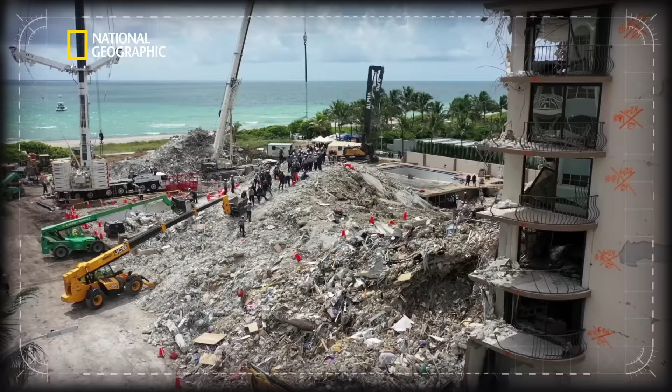In a high-rise building, there was no warning. At sea, innocent people died. In a train, everything was on fire and burning.

Disasters can begin with the smallest things: changing the opening hours of a restaurant, a bad glue job, a paperwork error.

Now, combining the latest research with every available source of evidence, experts will forensically analyze 3 disasters, down to each tiny detail. You've really got to think outside the box. You have to work your way back and understand each link in the chain.

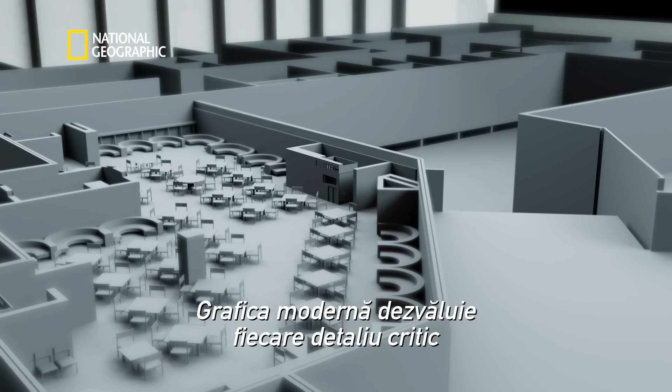State-of-the-art graphics reveal every critical detail at every critical moment. This whole disaster could have been averted. We can dissect them, get inside, or underneath, freeze time, and even reverse it.

To conduct a complete disaster autopsy.

Northeast Japan, March 11th, 2011. A massive magnitude 9.0 earthquake strikes just 45 miles off the coast. This is the most powerful earthquake ever to hit Japan. It had actually shifted the Earth on its axis.

A giant tsunami hits the coastline. The tsunami is absolutely devastating. Cars, boats, buildings, people are swept away. Over 18,000 people lose their lives. But even then, the disaster isn't over.

150 miles north of Tokyo is the Fukushima Daiichi nuclear power plant. This earthquake is an absolute disaster for the nuclear power plant. Over the next few days, huge explosions erupt at Fukushima. Now, as the news has come through of another nuclear explosion, we're being moved indoors. These are very nervous times.

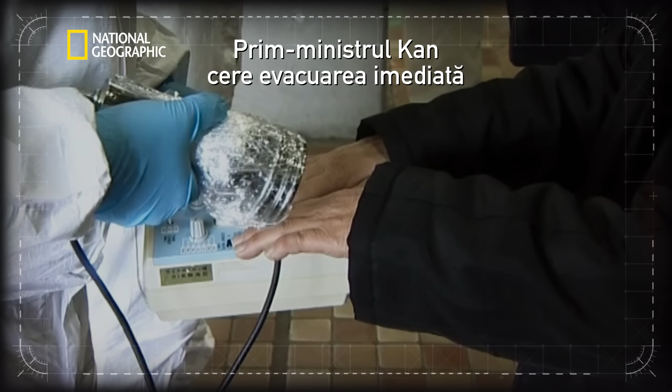4 of the plant's 6 nuclear reactors are destroyed. Nuclear regulators give the Fukushima disaster a severity level of 7, the highest possible rating, the same as the 1986 disaster at Chernobyl. Prime Minister Kan calls for the immediate evacuation of about 100,000 residents in the area. They are left without homes and deeply fearful.

Now, using eyewitness testimony, scientific analysis, and photographic evidence from inside the devastated reactors, we will recreate the disaster. What really happened at Fukushima?

It would be easy to point the finger of blame here at Mother Nature. There was an earthquake. But the thing is that Japan has 5 nuclear power plants located in roughly the same stretch of coast, and only Fukushima became a disaster. So there must be more to this disaster than just the earthquake. What is so special about Fukushima?

There are ancillary buildings, offices, workshops, but the main structures at the Fukushima plant are 6 nuclear reactors spread right along the coast.

Satellite images taken 3 days after the disaster show clear evidence of explosive damage. 2 structures are in ruins. It's clear that these are reactor buildings. Reactor 1 is clearly damaged. Reactor 3 is a smoking ruin. This is the core of the disaster.

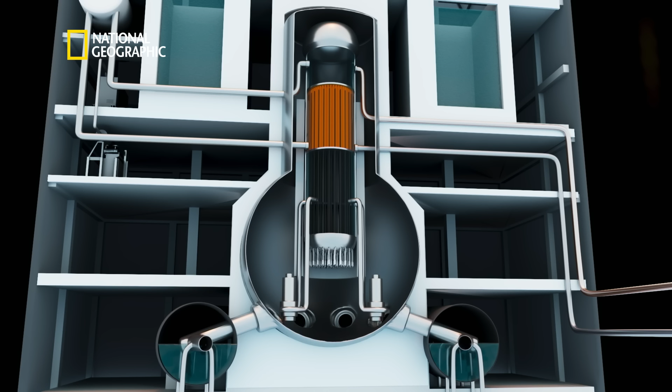So why do these reactor buildings explode? Fukushima Daiichi has boiling water reactors, which basically means that inside each unit, there's a giant steel tank, a pressure vessel. Inside the pressure vessel, there is nuclear fuel. And the nuclear fuel heats water, it becomes steam, the steam spins turbines, which generates electricity.

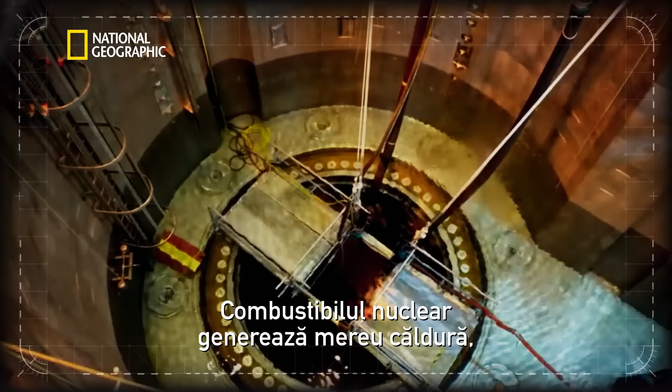So the critical thing to avoid is overheating. Because the nuclear fuel is constantly generating heat, it actually has to be cooled down, and otherwise, if it gets too hot, it will melt. A core meltdown is a nightmare scenario that the plant is designed to avoid at all costs. It's constantly having cold water pumped around it to remove the heat.

Plant data records that after the earthquake strikes, automatic safety systems shut down the reactors. But pumping cooling water remains essential to remove the vast amounts of residual heat still being produced. Data suggests this is where things begin to go wrong.

When the earthquake happened, Fukushima experienced loss of power. The crucial cooling water is circulated by electric pumps. Without power, they will stop. If the nuclear fuel isn't constantly cooled, you can get steam building up and up in the reactor vessel until eventually it becomes so pressurized that it can literally burst, releasing nuclear material out into the atmosphere.

Do the reactor vessels at Fukushima burst? After the incident, TEPCO, the Tokyo Electric Power Company, which owns the plant, sends camera-equipped robots into the site to try to get a survey of the damage.

They provide vital evidence from inside the containment vessel. So looking at the footage, we see that the containment vessels are actually still largely intact. There's no evidence of a steam explosion. It is clear the reactor vessels have not ruptured.

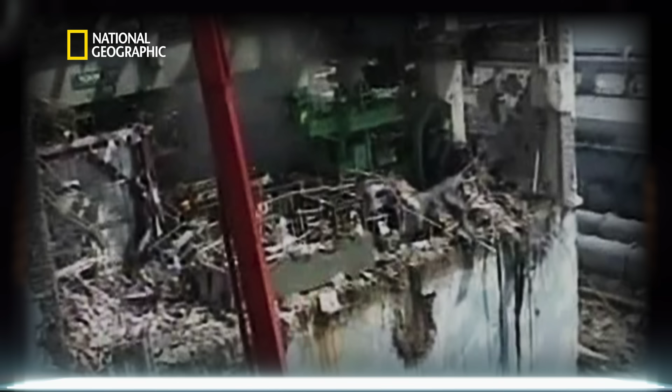So what does cause the devastating explosions? Video evidence from the robots reveals another vital clue. The nuclear fuel in reactors 1 and 3 has actually melted.

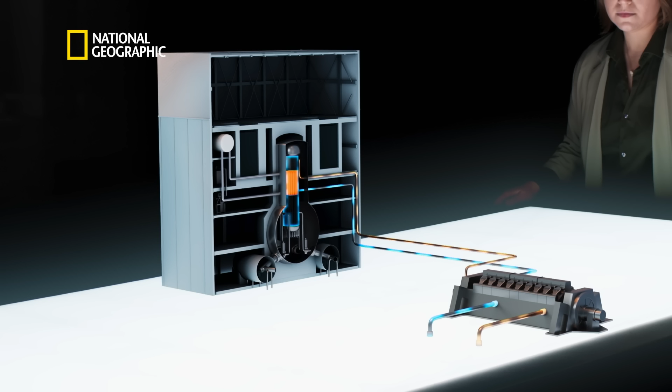Without pumps to replenish the water, the temperature inside the reactor starts rapidly rising to as high as 5,000 degrees Fahrenheit. This is not only hot enough to melt the fuel, like the robotic footage suggests happened, but also hot enough for a very dangerous reaction to start happening.

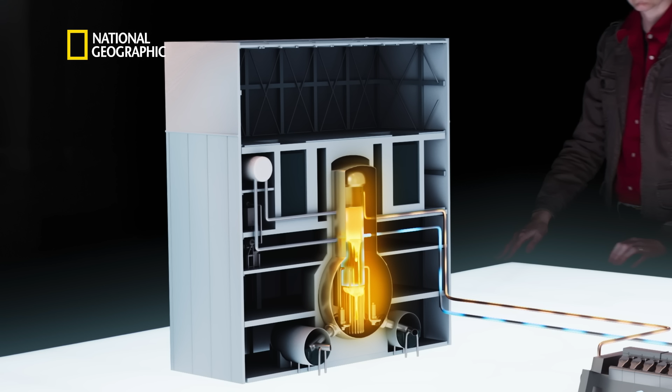Without cooling circulation, the water surrounding the rods will boil into steam, and that creates a whole new risk. The fuel rods are coated in zirconium, and that's important because in the presence of very hot steam, zirconium undergoes chemical reactions that produce hydrogen. Could the Fukushima disaster result from a hydrogen explosion?

Hydrogen is famously explosive, but only in the presence of oxygen. And there's none inside the reactor vessel.

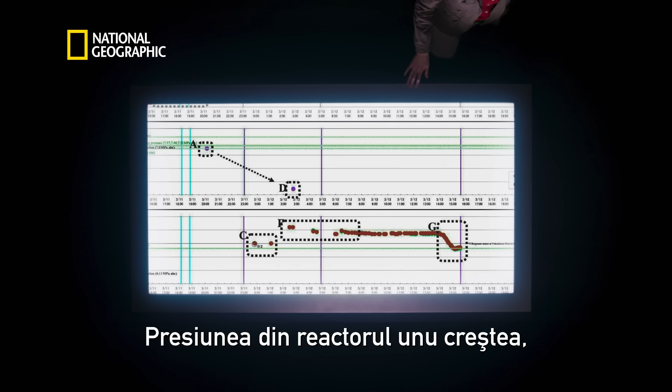But plant records from the morning after the earthquake might help explain what happens. The pressure in reactor 1 has been climbing, but at 4 a.m. this suddenly changes. When they measure the pressure in the reactor, it has actually fallen since the last reading, but nobody's done anything to relieve the pressure, meaning that there must be a leak.

This means that before the first explosion in reactor 1, a pipe is leaking the contents of the reactor vessel into the building surrounding it. With these ruptured pipes, they're not just releasing steam, they're also releasing hydrogen. And in the reactor building, there is plenty of oxygen. The hydrogen explodes, damaging the reactor buildings and leaking radioactive material into the atmosphere.

It is clear this disaster begins with the loss of electrical power to the cooling pumps. This causes a core meltdown, resulting in hydrogen explosions. But according to the design plans of Fukushima, losing electrical power shouldn't be possible.

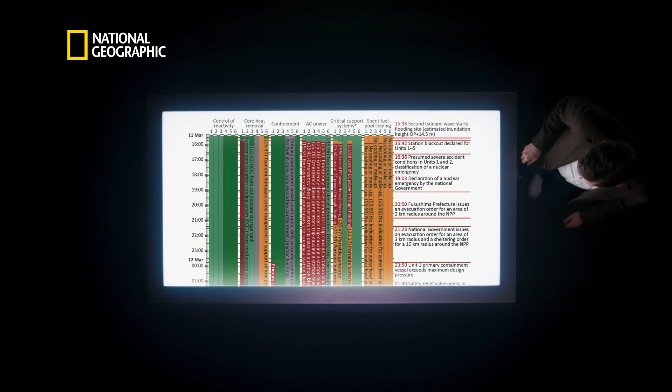There were a variety of backup systems, including diesel generators and batteries, to ensure that the electricity supply could be maintained even in the event of a power outage. But plant records show that less than 1 hour after the earthquake, nearly all this backup electrical power has failed. How can these separate safety systems fail simultaneously?

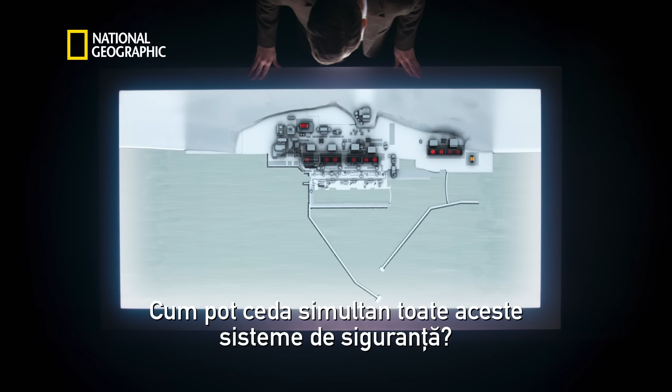The plans of the Fukushima reactor complex show that the majority of the power systems were located in the basement of the plants. And this is for a good reason. They're there to protect them from earthquakes, ironically. A lot of thought has gone into designing a plant that is earthquake-proof.

When they built the power plant, the engineers artificially lowered the ground about 80 feet such that it could be anchored into bedrock. This makes the plant more earthquake resistant. So, the safety systems were effectively bolted to bedrock.

But for coastal installations like Fukushima, earthquake damage is not the only risk. At 3:36 p.m. on March 11th, a 50-foot high wave hit Japan's coast. And this is just minutes before the backup generators and the batteries all go down.

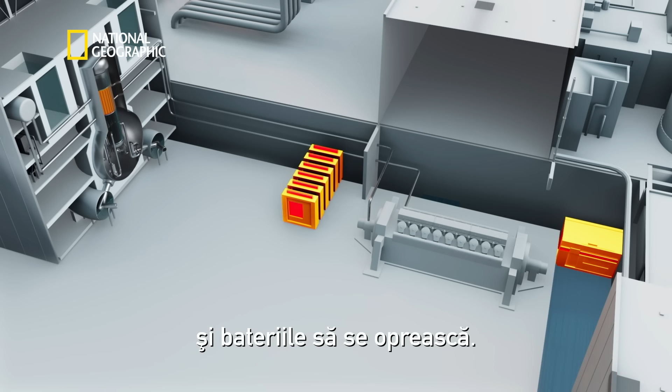Ground level at Fukushima ends up just over 30 feet above sea level, and the backup systems are in the basement. So when the tsunami hits, the basement is submerged, destroying the emergency electricity supply. But tsunamis are a well-known risk on the Japanese coast. Why isn't the site protected?

The Fukushima nuclear power plant is built on the coast because it requires lots of water for cooling its reactors. The problem with putting a nuclear reactor on the Japanese coast is that that coast suffers extraordinarily from tsunami waves. Images pre-disaster show that Fukushima is built with protective seawalls for exactly this reason.

When TEPCO was building the plant, they looked into the historic record to see how high they should build the seawalls to resist tsunamis. And they found that they would need to build it about 10 feet high in order to resist the big waves. To be extra safe, they actually added another 9 feet, building the seawalls up to 19 feet.

So why do these seawalls fail? Oceanographic data showed 2 tsunamis hitting the coast on March the 11th. The first, at 3:27 p.m., is 13 feet high and is easily deflected by the seawall.

This photographic evidence shows the second wave. It is very different. 10 minutes later, the big one arrives. It's 3 times higher than Fukushima's sea walls, and it overwhelms the generators and the batteries.

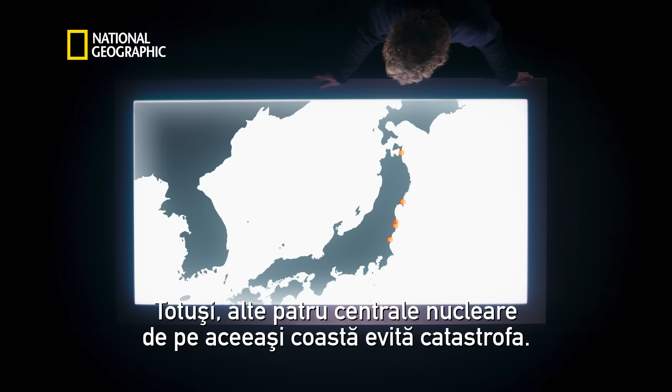Yet 4 other nuclear plants along the same coast avoid catastrophe. The Onagawa nuclear power plant, which is about 75 miles north of Fukushima, was hit by a wave of the same size, but it survived pretty much intact. Why is it only at Fukushima that tsunami defenses fail?

The designs for the Fukushima seawall were based on a tsunami that hit Japan on May 22nd, 1960, about 10 years before the plant was built. But that earthquake happened off the coast of Chile, 10,000 miles from Japan. So the tsunami wave, by the time it arrived, was only 10 feet high.

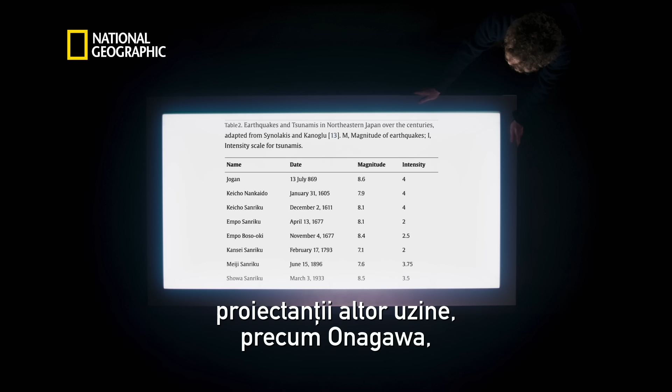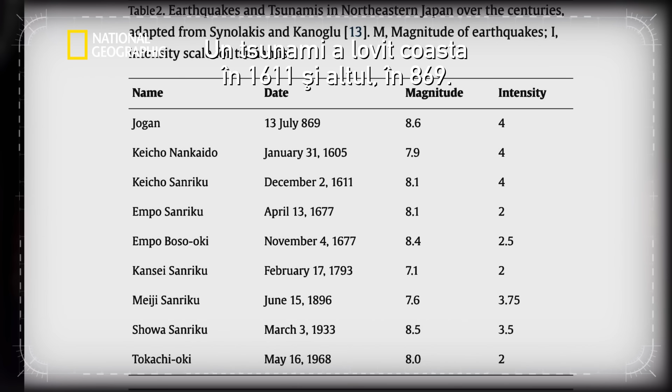Unlike Fukushima, the designers of other plants, like Onagawa, read Japan's centuries-long history of tsunami records in more detail. The designers of Onagawa had looked much farther back in history for the design basis of their seawalls, to a tsunami that hit the coast in 1611 and another one that hit in 869. Both of those tsunami waves were much larger than the 1960 tsunami. Because of that, they built significantly higher seawalls.

There is now enough evidence to piece together what happens in the Fukushima Daiichi nuclear disaster.

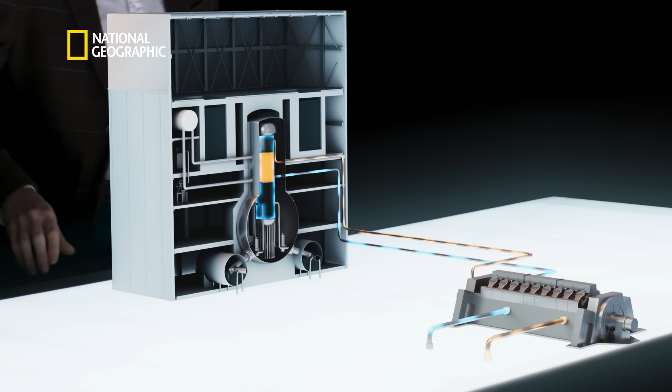At 2:46 p.m. on March 11th, 2011, a magnitude 9.0 earthquake hits Japan. The earthquake causes a loss of power at Fukushima and triggers an automatic shutdown. Backup generators kick in to keep coolant circulating around the reactor cores.

At 3:36 p.m., a 50-foot high tsunami breaches the seawalls around the plant, which has been built too low to protect it. Seawater floods most of the backup generators and batteries located in the basement of the plant's buildings. 5 of the 6 reactors lose power.

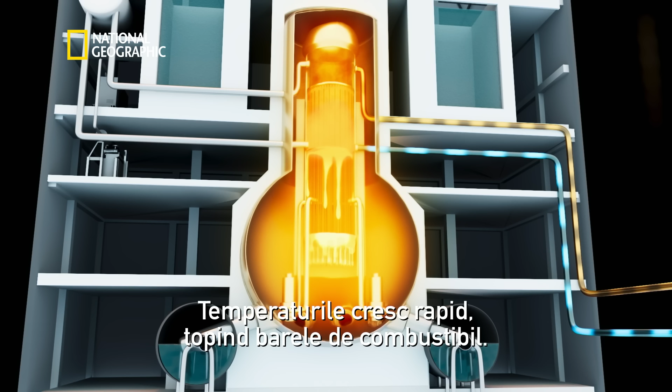Cooling water stops circulating around the active reactor cores. Without this cooling, the cores continue to heat and pressure grows in the vessels surrounding the cores. Temperatures rapidly climb, melting the fuel rods. Their zirconium coating begins reacting with the steam to produce hydrogen.

The highly flammable and radioactively contaminated hydrogen gas leaks out of reactors 1 and 3. The leaking hydrogen explodes, wrecking the reactor buildings and shooting radioactive material into the atmosphere.

It takes 2 weeks of hosing seawater into the reactors to stabilize them after the meltdowns. The workers who stayed behind risked their lives to prevent an even greater tragedy, although a lot of damage had already been done. Over 100,000 people were displaced, and giant swaths of land were declared uninhabitable and unfarmable.

In the months following the disaster, European leaders decided on a new set of safety standards for nuclear power, and several countries decided to forego nuclear power altogether.

The disaster may have been triggered by a natural event, but it exposed human errors in its design that still haunt Japan. There are many parts of the site that remain inaccessible to humans. It's simply too dangerous for them to go.

Fukushima was carefully designed to avoid the explosions that ultimately wreck it. But some disasters are caused by things whose sole purpose is to blow up.

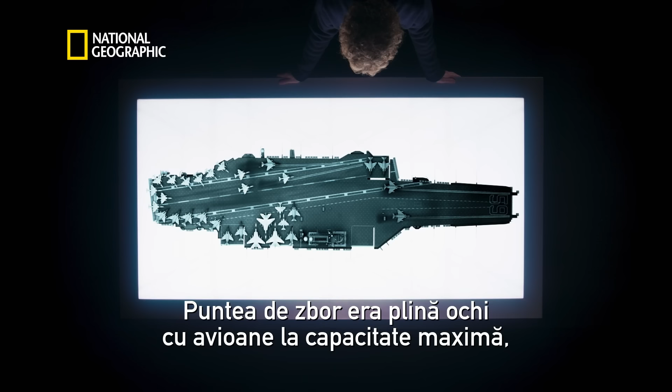Using the available evidence, we can construct a timeline of the disaster on the USS Forrestal. The crew were preparing for their second launch of attack aircraft that day, and the flight deck was absolutely packed with fully fueled aircraft, 2 of which had just taken off.

Surviving crew members placed the start of the fire at the rear of the flight deck, beneath 2 Skyhawk bombers, flown by Lieutenant Commander Fred White and the future Senator and Republican presidential candidate, John McCain. Eyewitness accounts suggest that the fire started after one of the fuel tanks on the 2 planes ruptured.

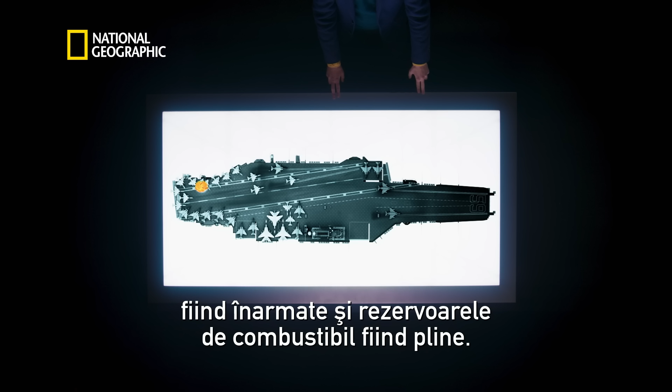Survivor testimony confirms that both planes are about to start a new bombing mission, meaning they are armed, and their fuel tanks are full. Each Skyhawk can hold 400 gallons of fuel. That means there are now gallons and gallons of burning jet fuel on the flight deck. And the flight deck is crowded with explosives and missiles and other fully fueled jets.

One of the most vital sources of evidence comes from the ship's PLAT camera, a manned camera system used to record landings and takeoffs. It captures the entire disaster on film.

The operator misses the start of the fire, but does manage to capture the crew grabbing their gear and racing off to fight the conflagration. 94 seconds after fire breaks out, there is an explosion underneath one of the Skyhawks. 9 seconds later, a second, more powerful explosion rocks the ship.

The explosion killed or maimed several crew members, including White, who couldn't escape his burning plane. But the pattern of fatalities recorded in naval records reveals something striking. Despite the ferocity of the blasts, only 28 of the 134 crew killed are up on the flight deck. Why are so many killed below decks?

Photographic evidence shows that exploding bombs create large holes in the 1 3/4 inch thick steel flight deck. And the deck has hundreds of gallons of burning jet fuel from the crippled Skyhawks running across it. The gash in the flight deck allows the burning jet fuel to flow down and penetrate into other decks, causing new fires and creating huge volumes of toxic smoke in confined spaces, which makes it very difficult for people to escape. Because the ship operates 24 hours a day, many crew are not even awake.

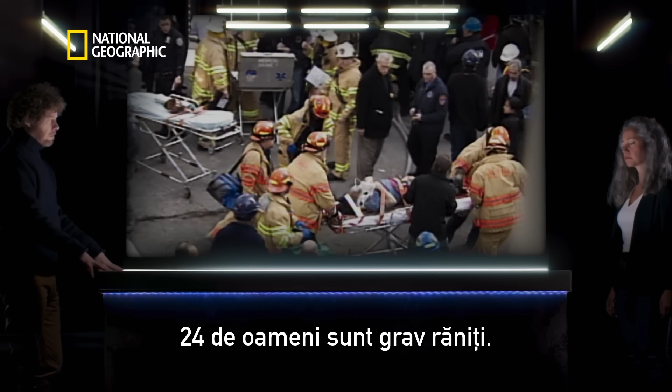The operator and a victim in the building hit by the crane also die. 24 people are seriously injured. This was a huge crane, and one eyewitness said that when it landed, it reminded him of what happened when the World Trade Centers came down, dust and debris everywhere.

Using eyewitness statements, engineering reports, and analysis of the wreckage site, we will digitally dissect the disaster. What causes this lethal collapse?

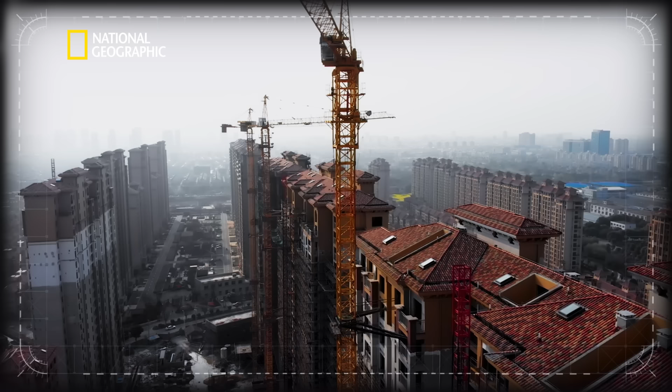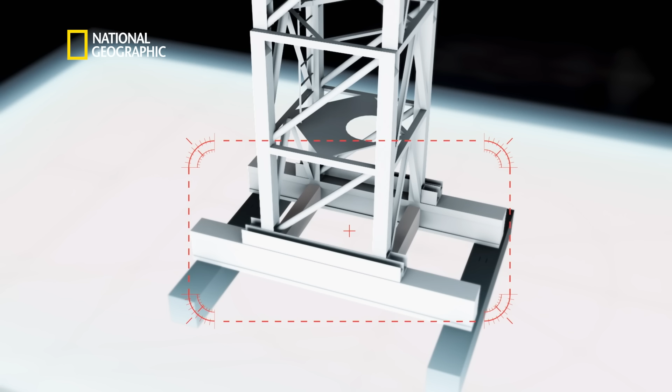The crane that collapses is known as a static tower crane. A tower crane consists of a single lattice mast, a horizontal boom, and the operator's cabin just below that boom. It's a static system, meaning it doesn't move, and it's fixed to the building. The collars and tie beams lock the crane onto the building, providing the lateral support it needs to stay in place. The bottom of the crane is secured to a concrete base. The crane legs sit on 2 large steel beams, which spread the weight over 2 large reinforced concrete walls. So the base is designed to take the whole vertical load of the crane.

But photographic evidence shows significant damage to this base. Could the entire disaster be caused by a fault in the crane's foundations?

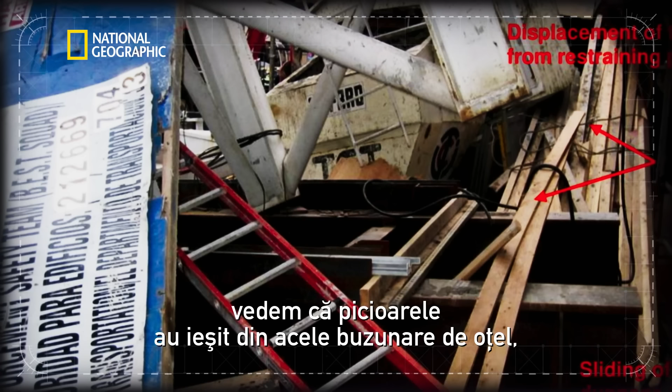The feet of the tower are displaced, but the design of the base is supposed to prevent this. The feet of the tower are in pockets on 2 steel beams which span between reinforced concrete walls. These steel pockets are designed to stop the legs moving sideways. When we look at the foot of the tower after the collapse, you can see the feet have actually moved out of those steel pockets, and the foot of the tower has moved towards the building. That really shouldn't happen.

Photographic evidence suggests the steel pockets have not failed. Instead, their edges have been crushed. One face is bent and squashed inwards. For this to happen, the tower leg would have to lean sideways into the edge of the stationary pocket to crush it. This means the pockets and base don't fail. The crush damage is caused by the tower above moving. That should be impossible. The tower itself is fixed to the building with connectors at the 3rd and 9th floor.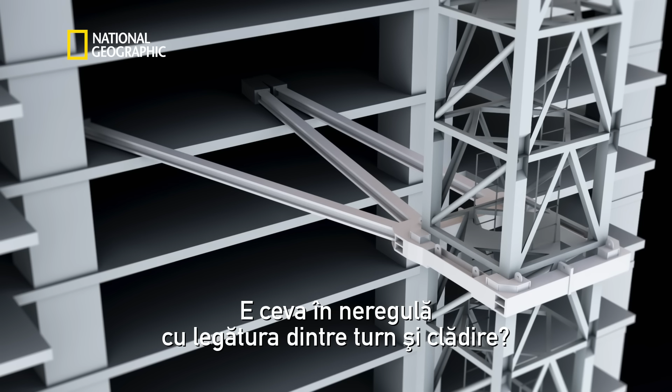Is there something wrong with the tower's ties to the building? To understand what happened, we need to create a timeline of the disaster. Engineers confirm that prior to the collapse, the crane is bolted to the building at the 3rd and 9th floors.

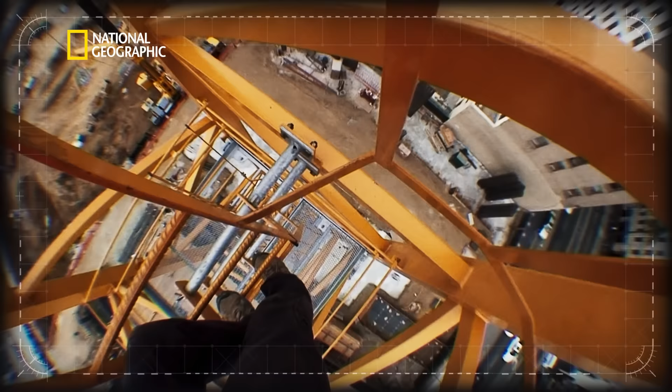The crane was involved in the construction of a 43-story residential building in Midtown East. Construction had already reached the 19th floor. As the building grows taller, the crane has to grow with it, a process known as jumping the crane. This involves installing a new section of the tower. We know from survivors that at the time of the collapse, the 6-man crane team had just completed raising the tower by 54 feet, working up to 238 feet above the Manhattan streets.

The latest segment had extended the tower as far as it could go without fitting a new tie to the building. So the next job, once they jumped the crane, was to fit a new collar and ties on the 18th floor. Evidence from the crane operators confirms the workers are attaching this 18th floor collar at the time of the collapse. The first sign that anything was wrong was when huge pieces of metal started crashing down the side of the crane. Photographic evidence at the 3rd floor level clearly identifies these huge pieces of metal as the collars holding the crane to the building. What we see is the collars from the higher elevations sitting on top of each other on the 3rd floor - the 9th floor collar sandwiched between the 3rd floor and the 18th floor collar, which was being installed at the time of the collapse.

How could both of these massive collars fall? Eyewitness evidence confirms that at the time of the 2008 New York crane collapse, the collar on the 18th floor is being fitted. This is a huge collar weighing 5.5 tons in 2 pieces, which are connected around the tower.

This key photographic evidence is taken just before the collapse. It shows heavy polyester slings temporarily supporting the new collar to the tower until workers connect it to the building with steel beams. Before they could connect the tie beams to the collar, these slings snapped.

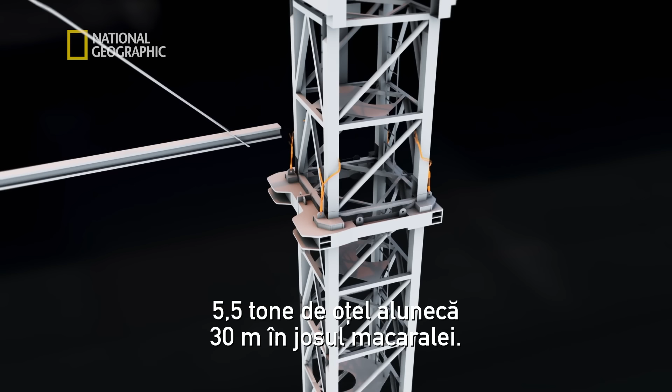This meant that nothing was really holding up this 5.5-ton piece of metal. 5.5 tons of steel slides 100 feet down the crane tower. It slams into the 9th floor collar. The force of the impact rips the 2nd collar away from the building. Both now plummet down onto the 3rd floor collar.

The 3rd floor collar doesn't completely break away from its connections, so that's why the 3rd, 9th, and 18th floor collars remain at that point.

There are now huge unbalanced loads on the tower. There is a permanent 42-ton counterweight on the back of the boom that allows it to lift much heavier weights. The counterweight creates a huge imbalance, and that's exactly why the tower is connected to the building to counteract that.

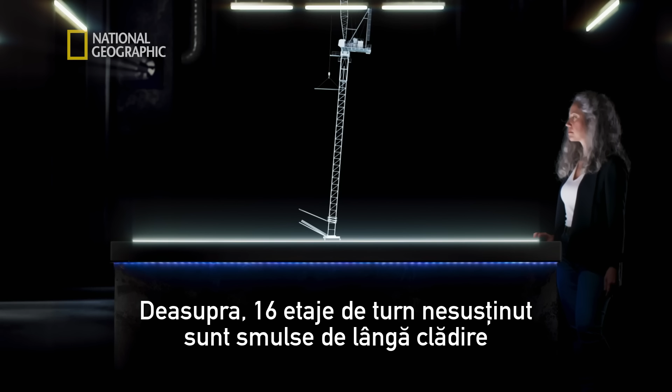After the collars fall, the crane is only connected at one point, the 3rd floor. Above, 16 stories of unsupported tower are being pulled away from the building by the immense counterweight on the boom. The crane tower was moved away from the building by the weight sitting on top, and it pivoted on one remaining connection at the 3rd floor collar. The leverage of the 42-ton counterweight over 16 stories above is immense.

This created enough force for the legs to pop from their pockets. Once that happens, the crane is doomed. The disaster is triggered by the failure of the polyester slings holding the collar on the 18th floor.

How can these have snapped? The crane manufacturer provides very precise instructions on how to lift the collars to prevent any potential errors. Each half of the collar has 6 lugs: 2 are for lifting the collar and 4 are for securing it to the tower. It is critical that the correct ones are used for each job.

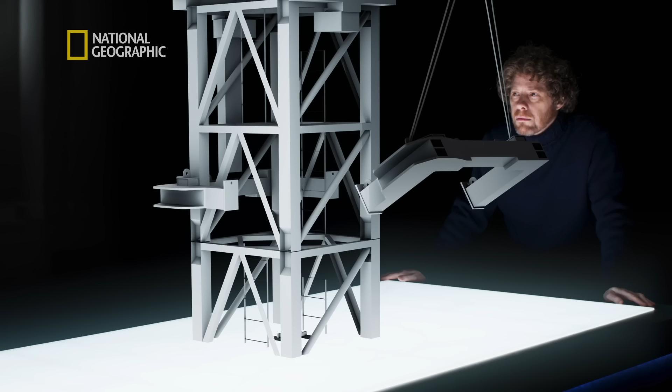What should happen is that the 2 halves of the collars should be lifted by the lifting lugs specified at the corners of the collars, and then secured thereafter using the lugs in the center of the collars. This allows the securing slings to be tied to smooth supporting bars on the tower, designed for that purpose, while the collar is secured to the building.

But according to the evidence, this does not happen. You can see from a photo taken an hour before the collapse that one of those halves is actually being lifted by the central connections, not the lifting lugs at the corners. It sounds like a trivial change, but the consequence is that the crane team secure the collar to the tower on the available lugs at the corners.

Now the securing slings cannot be fitted around the correct smooth bars. They improvised and just connected the collar to the tower at those corner positions. This improvisation creates critical problems. The first is that there are only positions to fix the collar with 4 slings as opposed to the 8 specified in the instructions. The collar is now held in place 180 feet above the New York streets by half the correct number of slings. And that's not the only error.

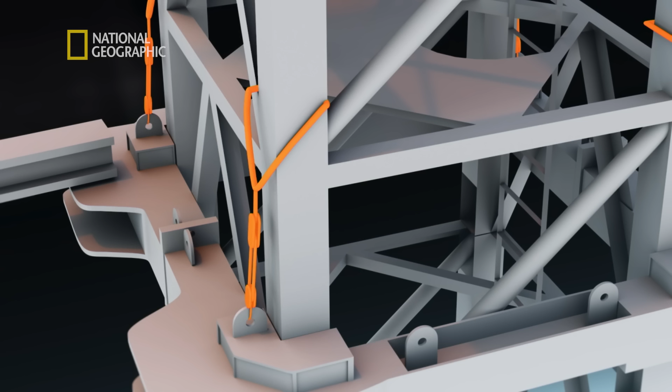By connecting to the corners, the slings are being forced into sharp V-shaped grooves, which brings them into risk of cutting at the sharp edge. So you have fewer slings under a lot of stress, being stressed over a sharp edge that gave them a risk of being cut. Not only are there half the correct number of slings, but they are secured in a way that makes them vulnerable to failure.

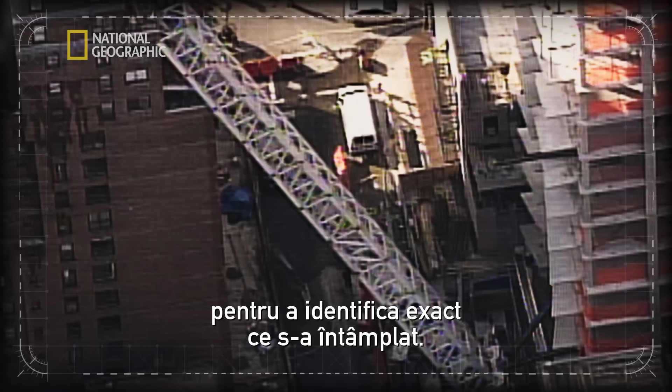We can now piece together the evidence of the 2008 Manhattan crane disaster to identify exactly what happens. The first in a series of errors that led to the disaster is the lifting of those collars by the wrong sets of fittings. This prevents the crane's 5 riggers, 200 feet up in the air, from securing the collar correctly, so they improvise. They secure it using half the correct number of polyester slings.

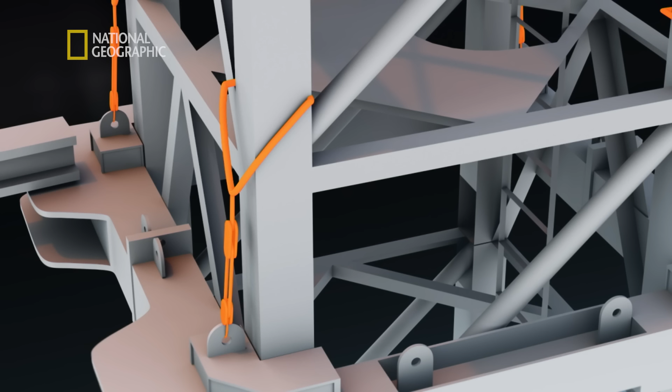They loop these weakened slings around V-shaped grooves on the corners of the crane. These pinch the slings and increase the strain on them. Before the riggers can attach the collar to the building, the polyester slings snap. The 5.5-ton collar falls 100 feet down the crane mast. It smashes into the collar on the 9th floor, tearing it away from the building.

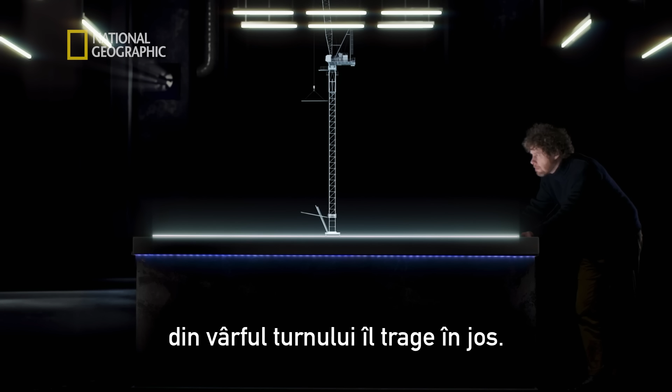The crane is now attached to the building by a single connection at the 3rd floor. At that point, we have our 42-ton counterweight at the top of the tower, pulling the tower away. The one remaining connection on the 3rd floor collar acts as a pivot point. The legs of the tower dislodge from their supporting pockets. The 238-foot crane falls into the adjacent building.

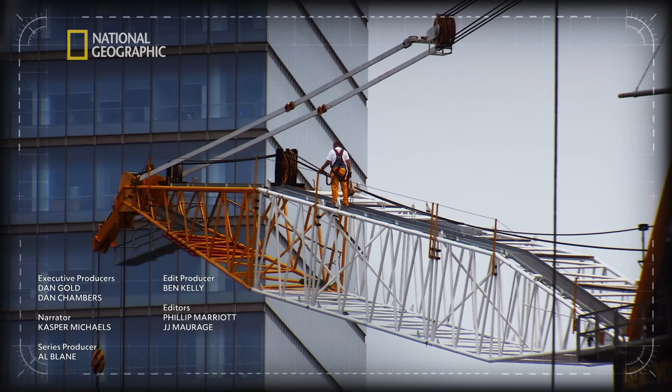The 2008 crane disaster prompted New York to change its regulations with regards to the safety of crane operation. Now, anyone involved in that has to take a 30-hour training course with refreshers every 3 years. The legislation also limits the use of synthetic slings, like the ones that snapped.

So, hopefully, no one else will die again in this kind of disaster.